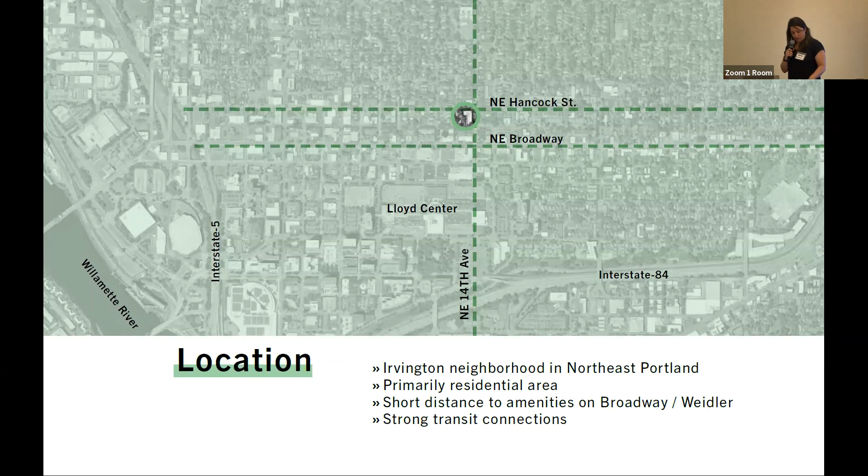The neighborhood itself is on the National Register of Historic Places, so it requires design review. And as Robert indicated, the initial motivation for the project was some envelope issues with the building skin. So that became a factor in the design process pretty early on, given we're in this historic neighborhood. There's middle scale and single family homes directly adjacent to this project, but there is really strong support for walking and rolling amenities in the neighborhood and a very mature tree canopy and vegetation. So it's quite a pleasant neighborhood to reside in.

So a few details. The apartment building is for 95 households. It was built in 1980. You see a picture of it here in its present condition prior to construction. We have completed permitting, but we have not completed construction yet. So this is a good moment for us to pause, think about the project, get feedback.

And take those important lessons forward during construction. There's been very limited upgrades to the building so far. So as you'll see throughout, we'll talk about the push and pull of an existing building and what we were able to achieve within the constraints of the existing building and budget. The apartment layouts, those 95 apartments, were pretty well laid out functionally, so we're not going to spend a lot of time on the apartments today. We're going to mostly focus on community spaces, and many of them have balconies.

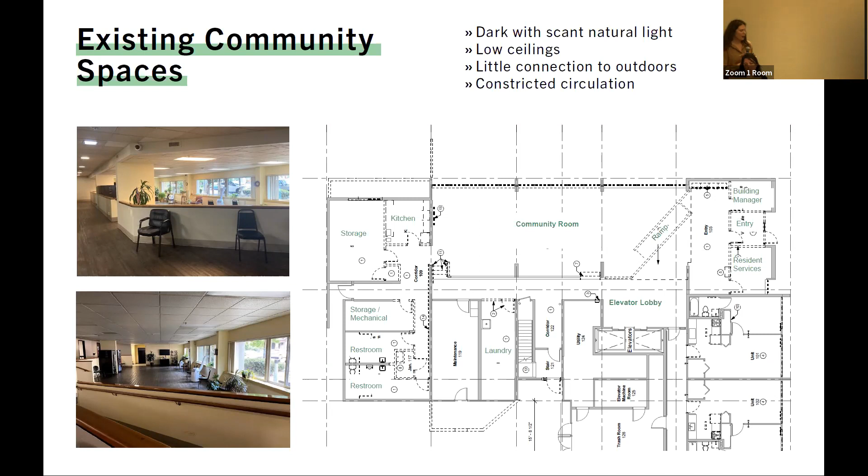So we replaced the showers, which were more like a tub. We replaced those with, or are going to replace them with, roll-in showers, and then reconfigured the kitchen so that it just works better for wheelchair use.

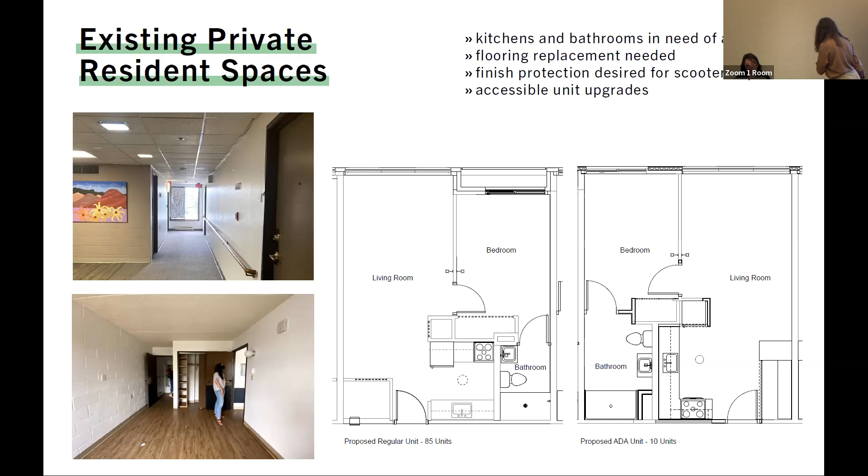And now Jannel will go over the exterior spaces. Okay, we'll trade, we'll trade. Thanks for being patient with us.

So to talk a little bit about the exterior spaces, as Robert mentioned, that exterior facade has significant amounts of water intrusion, which at first maybe wasn't as noticeable. And then, once we got into a further building analysis, we realized that water intrusion was also affecting the framing of the building. So we ended up needing to, unfortunately, consider a full reskin of the facade. We'll get into detail on what that looked like and what that meant, but obviously a lot of considerations went into that in regards to it being in a historic neighborhood, and how it fits in with the context of the residents who live here, really supporting them and making a great space for them.

One of the other things to note about the exterior is those balconies. About 65% of the units have balconies, which is great—people love them, we heard a lot about that from residents. They're quite small, only about 18 inches deep, so quite a few people are using them, they'll tuck a little chair out there.

They'll put their plants out, grow things, do things to make it personalized and feel like their space. There's metal trim that wraps the top of it, and the condition isn't ideal for being usable space, even though it's quite small. So durability concerns around the balconies as well is something that we looked into.

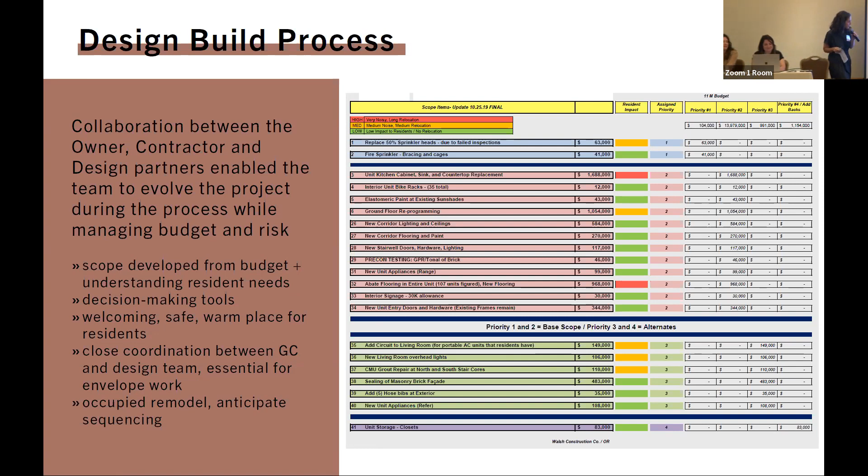Thanks, Robert. So we're going to start talking about the exterior design of the building. As I mentioned, one of the primary drivers with the water intrusion was how do we find materials and create detailing that gives everyone a sense of comfort and confidence that it won't happen again. So durable materials are really critical. We're also tracking tightly with Walsh on the cost impacts of materials, and being in the historic context, going through design review, we want to pick materials that are well balanced and fit within that context. We had a lot of conversations with historic design review around what is appropriate for this building and the historic nature of the facade and how that relates to the neighborhood.

So the primary material we ended up selecting was Oko Skin glass fiber reinforced concrete. It's a really durable material, quite cost effective. We've used it a few times, so we understand the pros and cons of that material. It also has a really nice proportion to it—it's quite small, and we felt it had a relationship to the wood lap siding on a lot of the residential single family homes you see around the neighborhood.

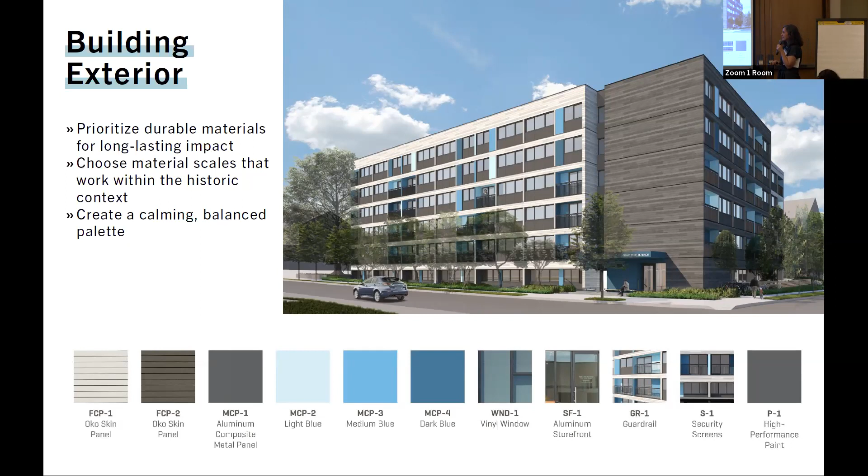As we talked about before, these balconies were really important to the residents. This isn't reflective of all the lovely things they populate on those spaces, which I wish I'd had in this rendering, because they really personalize the spaces in a lovely way. So we felt it was really important to bring the color to the balcony itself so people could enjoy the warmth of that material and feel a sense of identity and differentiation between some of their neighbors. People that don't have balconies also get the blue—we wanted to identify that blue color tracking up the facade. It helps emphasize these balconies as an important feature but also to break up the scale. The other important thing, I won't talk about the nitty gritty of our details, but we really get excited about detailing, and it's really important to us in terms of the longevity of the building and having Home Forward have a comfort level with this in the long term.

So we really studied in a lot of detail how these balconies come together. The new facade material with the exterior insulation brings that facade out a couple of inches, so tracking how that works through in terms of the footprint was really something that we got into the weeds on.

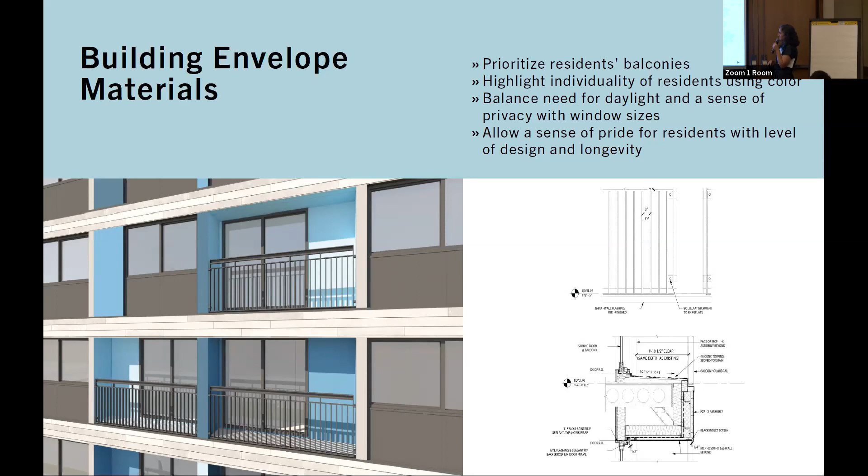Yeah, thanks, Amanda. To talk a little bit about the work that went around the site in terms of studies, Ground Workshop was our landscape architect team. They're not here today, we didn't have enough chairs, frankly. They're a great team, we've worked with them a lot.

They went to a high level of detail in terms of how do we start identifying different spaces around the site for additional opportunities for residents, above and beyond their small balconies, or if they don't have a balcony. They already have a lovely community space, which Amanda and Lauren have talked a little bit about, and there are a lot of ways they've done a great job enhancing that space.

But in addition to that, I think it's helpful to give opportunities for someone to step outside, either by themselves to have quiet time alone, or to meet with a friend in a one-on-one situation, or to gather with a small group of friends. So a wide variety of scales.

It's heavily used and really valued as an amenity space for them right now. There's not a lot there in terms of seating opportunities; there's a low wall that wraps that corner and it's right on the sidewalk edge. So I think the conclusion the team came to was, obviously, we want to preserve that tree, it's a great amenity for the residents and the neighborhood. So we ended up doing a really small intervention, adding some benches there that were deep enough to comfortably sit on that wall, but otherwise left it alone.

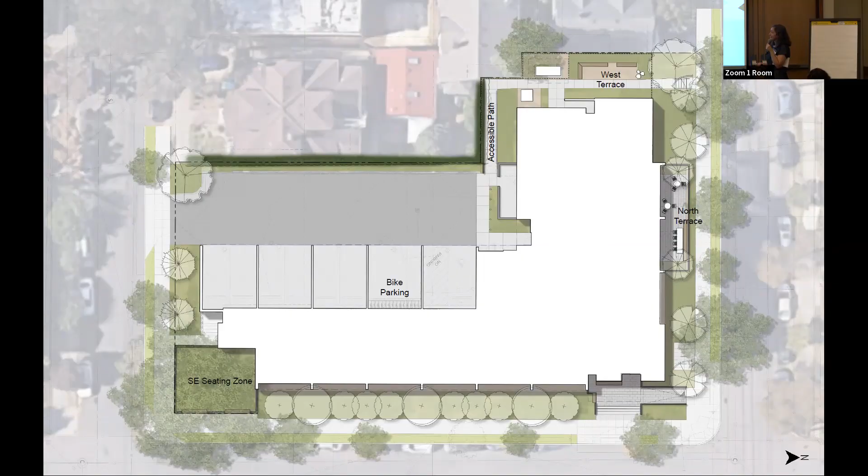So this building entry that we've been talking about has a really large structural shear wall, and unfortunately there's no capability to put larger entry doors or windows into it, which is really challenging when you're trying to create a sense of welcoming and openness to a very large scale building. It also has a really small footprint in this area, so there's not much room to do a lot with that space. But I think the team, in working with Ground Workshop pretty extensively, did a pretty successful job in a lot of subtle ways here.

So we obviously took out the false wall and the low site walls. So there's a lot of visibility directly into this building entry set of double doors here. We've kind of opened up and widened both the stair and the ramp to allow people to walk together or pass easily side by side and get a similar experience from both sides.

We studied different ramp configurations, as we love to do, and tried to find all the options. There really, unfortunately, wasn't a way to get the top of that ramp next to the top of the stair, which is something that normally we would try and prioritize.

Ground Workshop worked really hard to get a lot of lush landscaping, as you're seeing in their lovely rendering here, that really supports the space and tries to make it feel cozy, safe, and inviting. We have as large of a canopy as we could get out front to provide rain cover without having to drop a column down, to eliminate any barriers and really get as open of a feel as we could to that space. And then we tucked a couple of benches under there to allow an individual or a couple of people to chat together or wait for ride share.

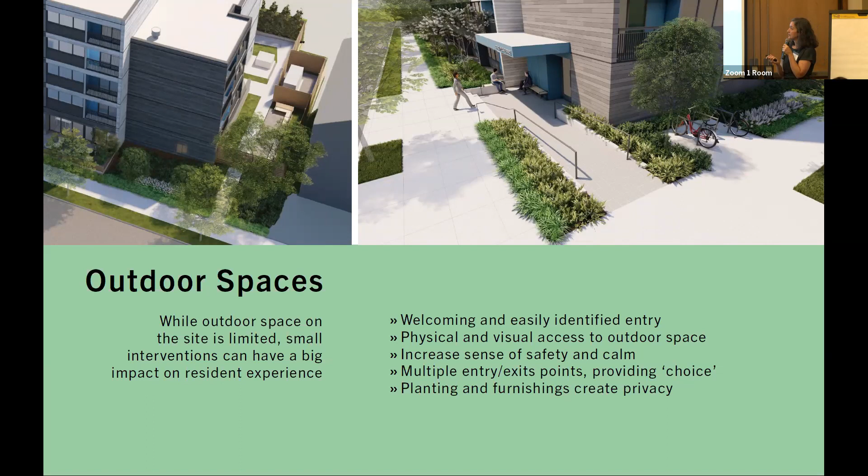So this was a really interesting found space, and one that's going to lead us into discussions of the interior with Studio Petretti. As I mentioned, these narrow bands of existing landscape between the building edge and the sidewalk are about 12 feet wide. But that existing community room down here at the lower level is sunken a couple feet below the sidewalk and had higher windowsills here.

Not a ton of daylight getting into them. It was a decent amount, but we thought there was opportunities, especially with it being north facing, to really enhance that. So the team came up with this idea of creating a small outdoor space directly attached to the community room. It would allow for, if there's a large gathering, an overflow space or a space to step out from an event to get away or have a conversation with a friend.

It's not huge, but there's enough room to have a series of seating opportunities, both fixed bench and table, and loose chairs, smaller configurations of seating to allow people a sense of choice in where they sit and the size.

Obviously, the challenge here is you're sitting in a space that's about 2 feet below the sidewalk edge, very close to the sidewalk. So there were a lot of studies done in terms of what level of screening everyone feels comfortable with in terms of landscaping. How high is it? How low is it? What type of screening element goes around here?

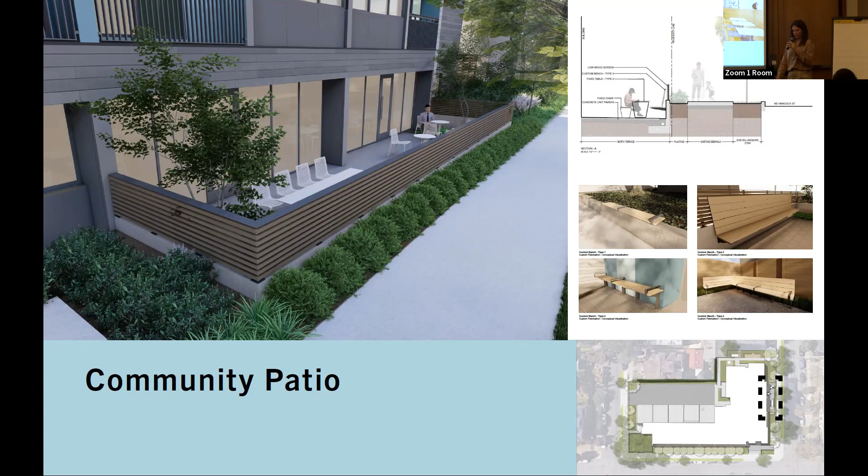So moving into the interior community spaces, you can see the patio that Jannel was just telling us about is right back here. So this is that existing community space that seemed a little depressing that we were joking about at the beginning. And these windows here were this kind of more horizontal orientation that didn't really give great views to the exterior.

One aspect of trauma-informed design that's really important to keep in mind is any opportunity you have to connect the interior to nature, like views of trees, fresh air, natural light, that's really important to take advantage of.

So we wanted to maximize this condition of having this sunken community space, and a little bit more—due to that, we had a little bit more vertical height to work with. So we expanded those windows to really enhance that experience to the exterior patios.

Throughout the design of the interiors, one of the priorities was making really durable and easy to maintain materials. I'm sure most of you all here know how important that is in these projects. But with that, we wanted to make sure that we also made it feel very welcoming and like an extension of the residents' living space and a very special space for them.

So that's where we brought in these warm tones with wood on these built-in banquettes and these kind of soothing blue colors. We're using a natural wood tone in this vertical ceiling, and we used the orientation of the ceiling to define zones within the space so that it's not a huge space, but it is an open space.

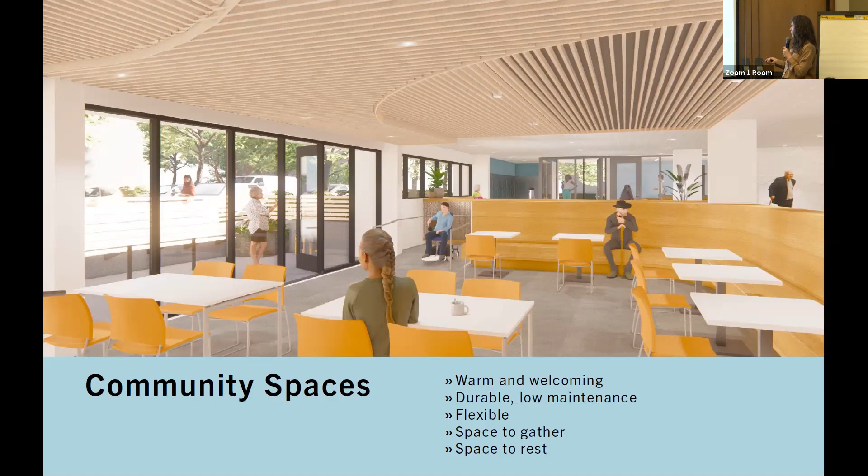Looking at the finishes, this is really important to keep in mind. Like we were noting in the beginning, that yellow color on the walls is not very uplifting, even though outside of a space, yellow is like an uplifting color, but it needs to be used well. With trauma-informed design, using calm and soothing colors is usually encouraged, and obviously there's cultural factors that go into that as well. It's not going to be the same for every population, what kind of colors are uplifting.

We went with these kind of soothing blue tones in the paint and some tile selection. This is actually a blue, it's not showing up very well from the projector, but it's like a nice deep blue color. We balanced those cooler colors with natural tones in the wood and tile selection, so you have this balance of cool and calming, but warm, so it still feels like home.

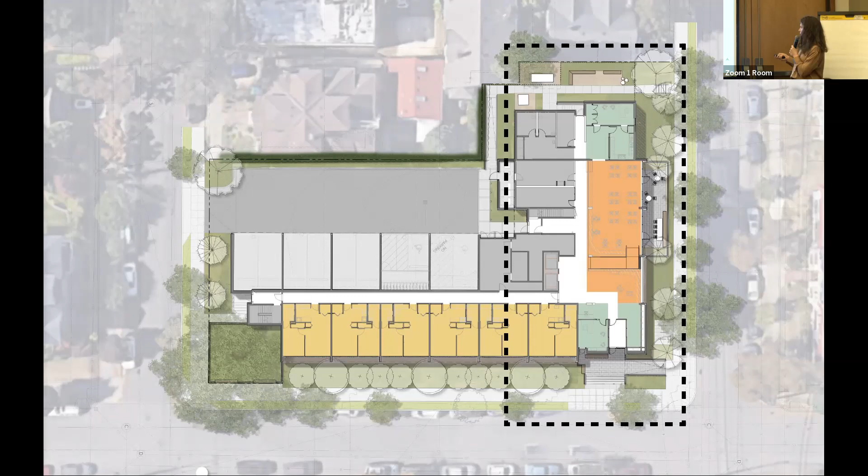We'll zoom in on that area. The main entry is here, this is where we were talking about earlier - it was kind of this tunnel-like experience when you walked into the building. Due to the existing architecture, you can see this alcove created by the existing exterior skin. We weren't really able to expand the vestibule very much, but we did visually expand it by surrounding it with glass instead of the solid walls that were there before.

As soon as you walk into the building, you have this sense of you're in your space, your community is surrounding you, and you know where to go. The property manager is located right next to the entry so they can see who's coming and going, and when you enter, you can see that there's help available to you if you need it.

This is the new ramp that we reconfigured. It used to go at an angle like this, so reconfiguring it this way makes the community room flow a lot better. There's no more weird kind of wedge-shaped unusable space in that corner. It allowed us to really open up this lobby space.

One of the elements of the program at Grace Peck is that coffee is available in the lobby to residents every morning, so we wanted to really enhance that experience and create a more social space. So this lobby is what we've called the coffee lounge, and that has a direct relationship to the elevator lobby, which leads to the residential units. Now there's just a much more direct relationship between the units and this kind of extended space.

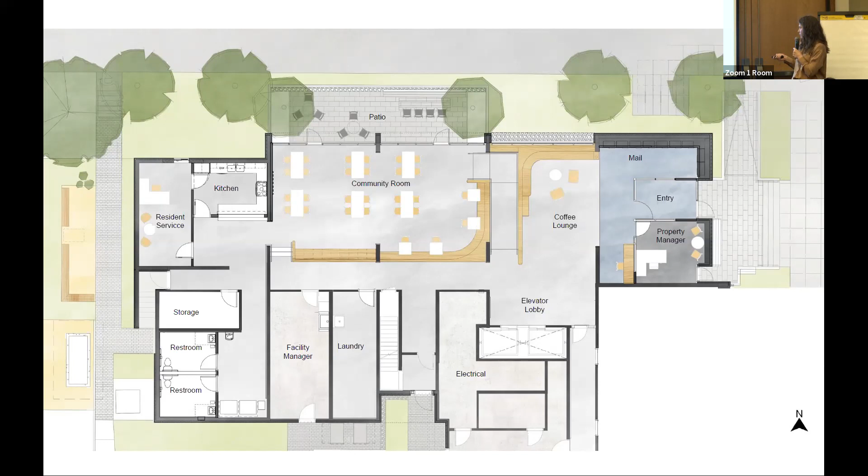Just quickly zooming in on that, you can see the relationship of the entry to the mail. As soon as you walk into the entry, you can really see mailboxes, this seating area, and then once you walk out into there, it's a direct line of sight to the elevator lobby.

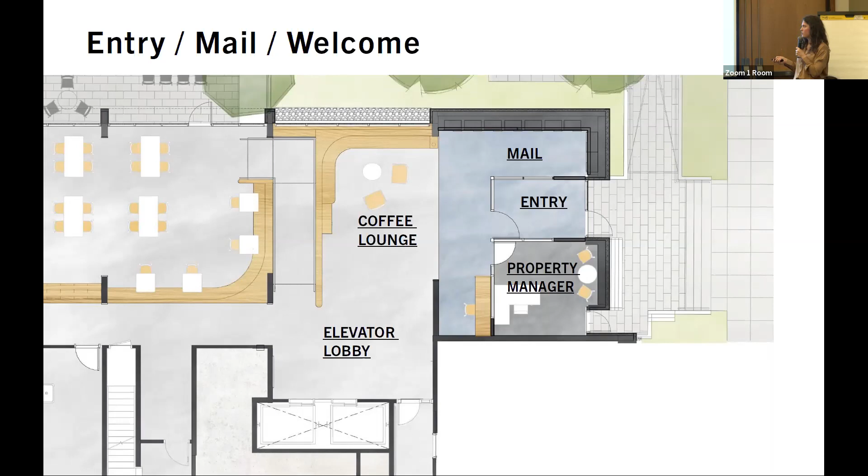We purposefully use these curved shapes to encourage a bit of a more social atmosphere and really enhance the sense of community. We created these banquettes that have a kind of a back behind them so that you have that sense of safety. We also maintained open sight lines to the community room, which is behind this banquette, property manager's office, and the entry. You get a glimpse back here of how there's a direct line of sight from this seating area out to the street now, which previously was blocked by these landscape walls that we'll be removing.

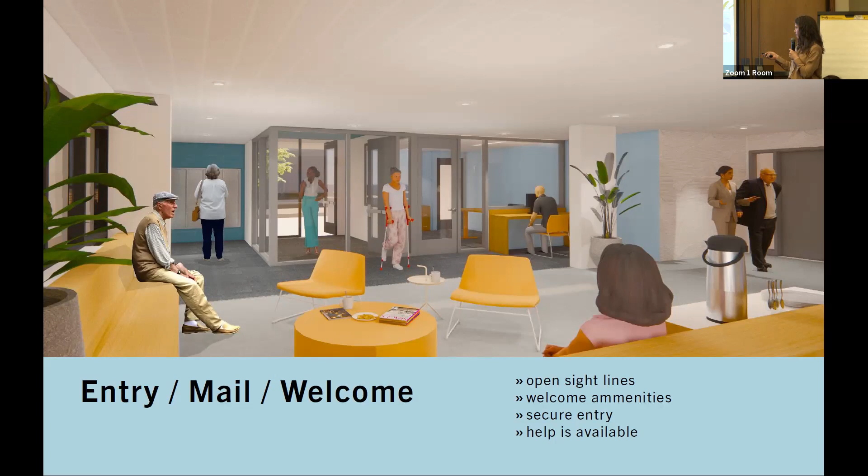This is the area that's sunk in about a foot below the rest of the ground floor, so we wanted to take advantage of that by creating like a contemporary sunken living room. We surrounded the exterior perimeter with this banquette and a serving counter, which is where they can serve catered meals to the residents. You can see the nice flow between the patio and the community space there.

This is the kitchen, which is where they'll prep community meals. Generally when they do community meals, they'll serve the residents at tables. We were hoping we could create a direct line of sight from the kitchen to the community room, but this was a very important structural wall that we couldn't cut into.

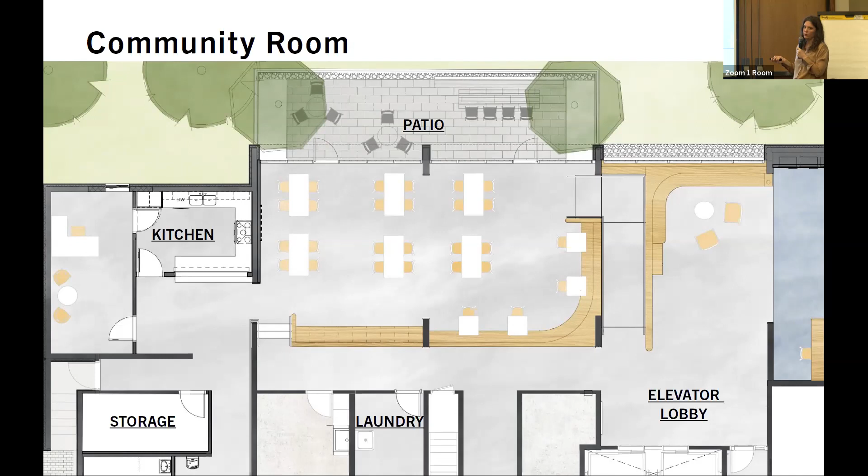It actually worked out pretty well because we're working with this more open space and we always want to create that sense of smaller zones and flexibility. Having the TV here works well because this zone becomes more focused on the TV, whereas away from the TV you can have more of a social space or a quieter space. We're always trying to give options to the residents when we're thinking about how to lay out the spaces.

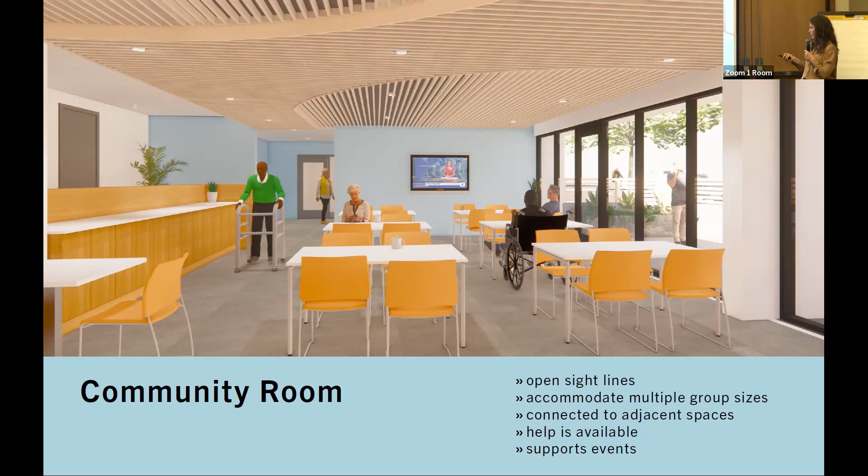When the team says we couldn't go into these structural walls, we could have. True, it just would have cost a lot. So just to give you a heads up that the process is a lot of weighing advantages and disadvantages. Exactly. Totally.

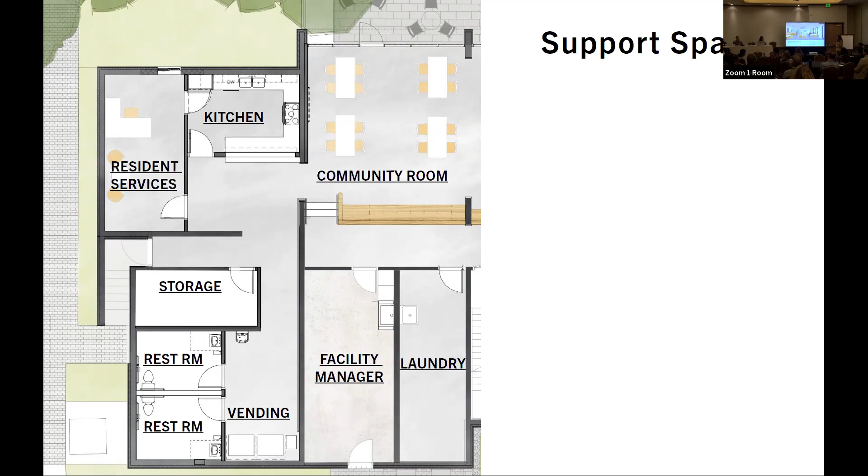A quick look at the support spaces, which are very important. That's the kitchen we were just talking about. There's also an office back here, which is an essential component of the program at Grace Peck. This is the resident services office, so this was where that unused storage space with the sad exercise equipment was.

We really wanted to activate that space so that it wouldn't become this unused, underutilized and dark, depressing space. So we strategically located the resident services office there so that when you come through the community room and back to this area that's far from the main entry and the property manager's office, you always have that sense of help being available to you and people being there and your community surrounding you.

In this back corridor here, we've widened it. This was the corridor that was like 3 feet wide, so we've widened this to 5 feet and created a more open circulation space in front of the restrooms. We reconfigured these restrooms so that they now meet current ADA standards.

A quick note here, it's actually not showing in the plan, but this is the existing laundry room, which we couldn't really change -- well, again, we could if we were completely redoing the entire building, but with budget limitations, we had to keep the laundry room where it was. It just wasn't a priority to move it.

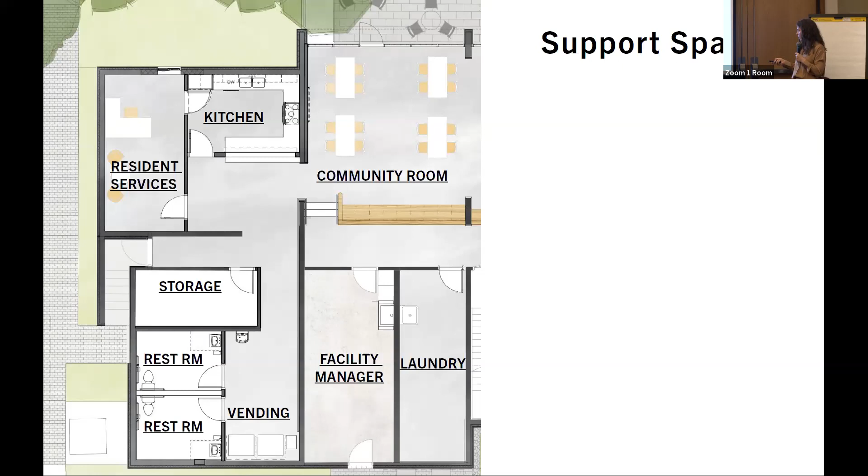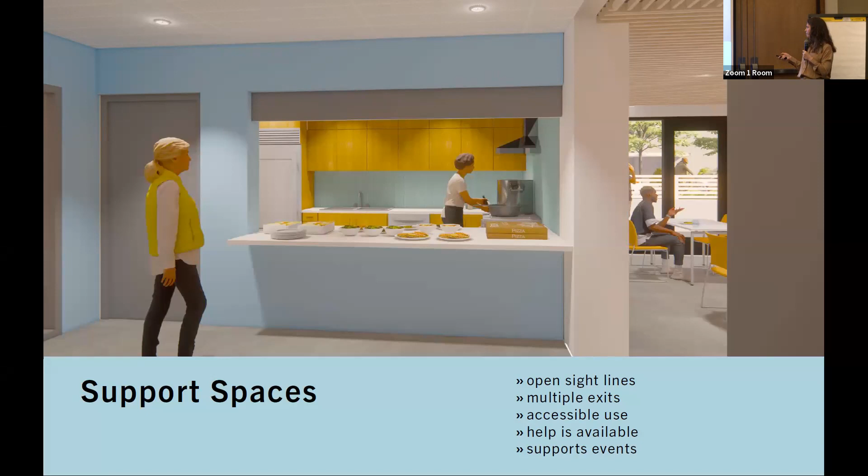So we've gone over a lot of detail on the project. Hopefully we hit some high points for you all about how trauma-informed design has been integrated into this project. We wanted to sum up some of the tools that we use, or things to take forward to next projects, that will then lead us into a question and answer. We'd love to hear your feedback and hear what you've been struggling with and had successes with in trauma-informed design.

The first item I want to highlight is that resident advocates are really important to this process. There were a lot of folks at Home Forward that gave us really crucial feedback that helped us make both big and small decisions throughout the project. Specifically, some items about safety and security are also relevant for staff in addition to residents. We didn't highlight it as much in our discussion, but in the resident services office and project manager's office, we had two points of entry and exit. Sometimes there can be escalating discussions with residents, so making sure that both residents feel safe and supported, and that staff does as well since they have a really hard job, is really important.

Speaking directly to residents about their needs - we had one lesson learned about balconies. We thought maybe we were solving one problem, but we were causing another after we talked to residents. So those balconies wound up staying, and that really did help folks feel like they could have an outlet from their apartment and connect to the outdoors.